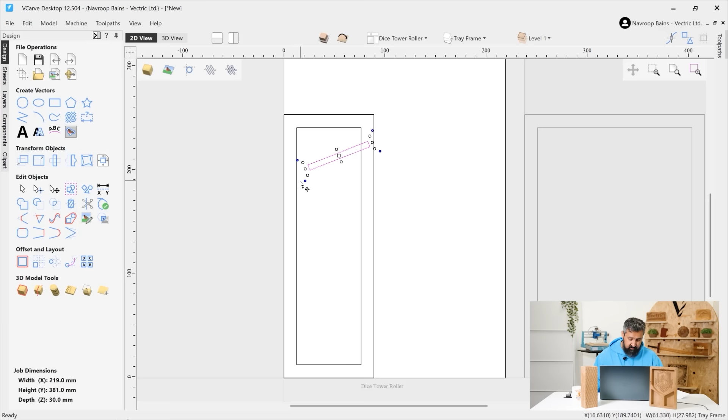So what I'm just going to do now is roughly position this to where I want it, kind of overlapping this edge here. I'm going to use this blue rotation handle to rotate this to get the angle for the rolling that I want. You can see it's starting to take shape, but clearly this is not enough room here to get the dice through, so let's reduce the shape a little bit. Let's zoom in and pull that ramp in just a little bit there.

Now what we can do is use our measurements to aid us. If we come over to the measure tool, which is just over here under Edit Objects, I'm going to measure the distance from this edge here to this edge here. I can see that it's currently 30 millimeters, that's plenty of room for the dice to get through. So that's already a good start, and I'm quite happy with that.

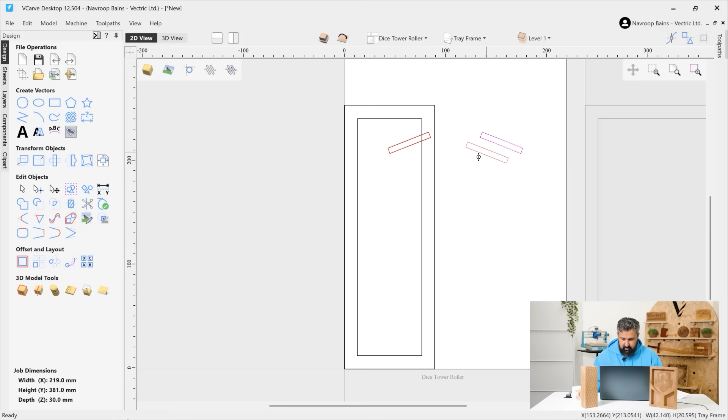With that in mind, I'm going to now make a copy of this. I'm going to press Control Shift H to make a horizontal copy - you can see it's flipped it over there. I'm just going to drag this one into a rough placeholder on the left-hand side here. Again, I'm going to measure between these ramps to make sure there's enough room for the dice to roll through. So let's go from the very tip here down to the top of this ramp here - that's 46 mil, plenty of room for my dice. Again I can measure from the edge here to the edge here - 29 millimeters, and that's great because I know in this case my D20 is 25 mil tip to tip.

Finally, I'm going to make another ramp, and that is going to be the exit. So we've got one for the entrance, one for it to roll again, and then we're going to have an exit ramp here as well. Let's select our top ramp, hold Control and Shift, and I'm just going to left mouse click and drag a copy of this one.

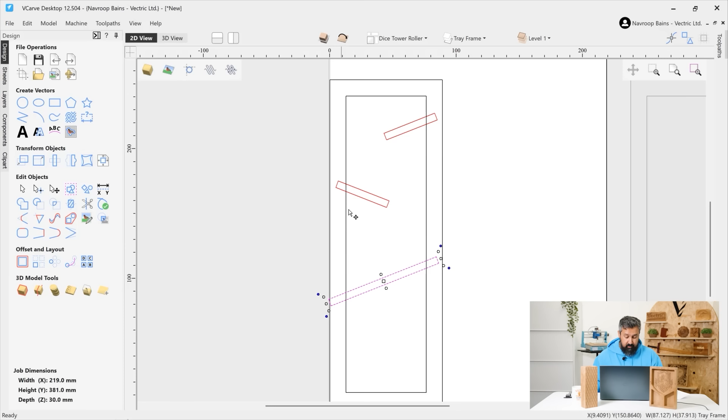I'm just going to let go around here, and I'm going to elongate this one so it exits all the way through the tower, so wonderful, that goes past the edge. We're serving two purposes here, because we're having a ramp for the dice to exit, but also underneath that we've got this big pocket we're going to form to store our dice.

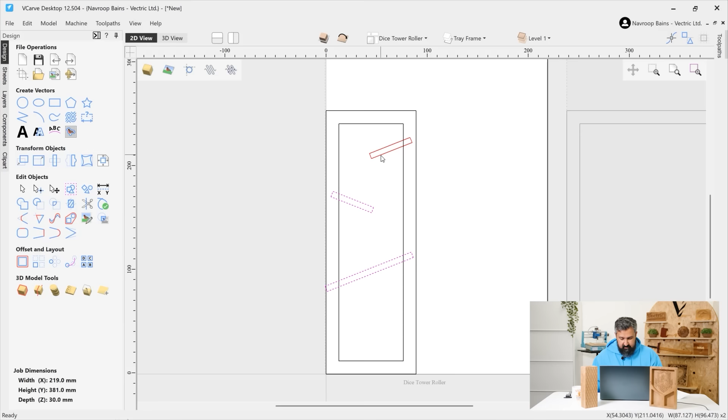With that in mind, we've got a rough setup for our ramps. We should really put these on their own layer so they're separated and we can come back to them if we make a mistake. So left mouse click while holding Shift, right mouse click, move to a layer, new layer, and we'll call this one Tower Ramps. We'll give this a different color, let's go for orange, and click OK.

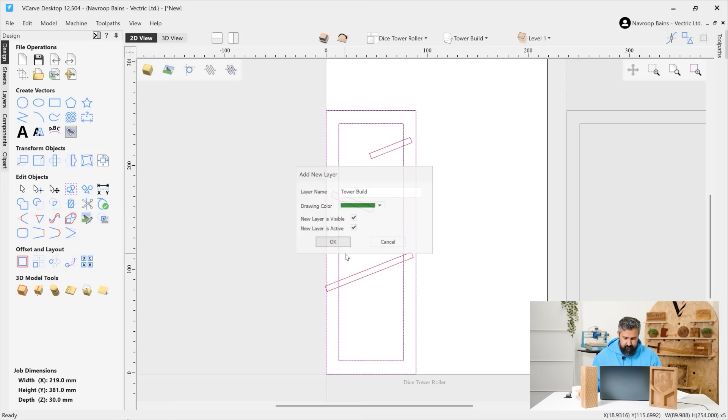Now the benefit of this is we have a copy of these vectors for later if we make any mistakes. So I'm going to select all of our vectors, left mouse click and drag, and copy these vectors, not move this time. Copy to layer, new layer, and I'll call this one Tower Build, because now we're going to take all the vectors we've just made and start building them into the actual one unit of the roller element. I'll give this a nice green color, click OK, and let's start turning off the layers we don't need for the moment.

We don't need the tower frame on this sheet, we don't need the ramps for the moment, we're going to use this as the active layer. So let's double left mouse click to make sure that is the active layer. Now that we've got our ramp set up, let's look at trimming away some of these elements to make sure the vectors are all lined up, and we're also going to add a gap here for the entrance and an exit for our dice.

To exit through, we're going to go back to the draw rectangle tool. This time we're going to hover our mouse until we snap to this corner here, left mouse click, drag until we snap to this corner here, and then drag this vector just past the top. The reason we're doing this is because we want to make sure that when we come to cut this, the end mill cuts past that so we get a lovely clean finish for our entrance. And we're going to do the same with the exit.

So we're going to come to here, snap to this point just here where the ramp meets the inside frame. Left mouse click, and then we can drag down to this ramp, and drag it out. In fact, I'm going to drag it down to the tip of the ramp here, and drag that out. Wonderful, now we have our exit here as well, and now we can start trimming away our vectors to actually make this all come together.

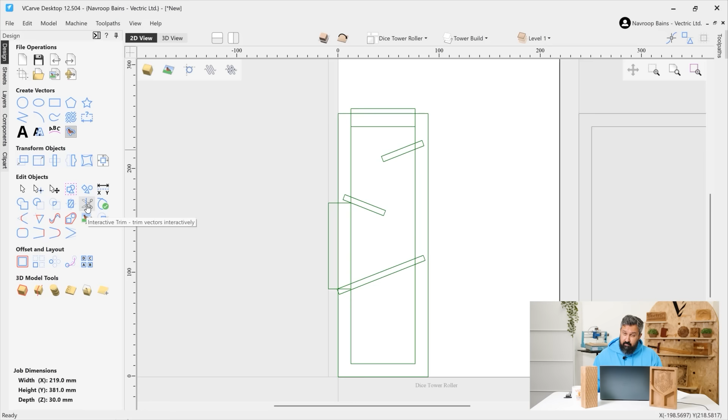To do that, let's go to Edit Objects, click on this icon here which is a pair of scissors, and we're going to start trimming away these vectors. Now it's important to have the rejoin trimmed sections on, because this will mean that when we trim away these sections, the vectors will be rejoined again to make a solid vector. Let's zoom in so we can see nice and clearly what we're working with, and we're going to get rid of this section just here and cut away this section here. Wonderful, so now the ramp's part of the frame.

Now we need to think about how we're going to do this, so we need to get rid of this one. In fact, we'll Control Z and get rid of this one first, and then go back in and get rid of this one here. So what was actually happening there is the software had an overlap of vectors, and it was trying to decide which one to delete, because one is on top and one is on the bottom. In that case it made the decision to delete that entire area, but as we can see, we can just easily go back, Control Z, and rectify that.

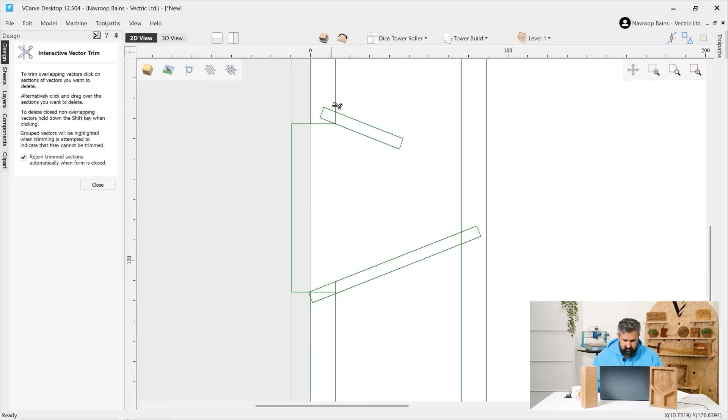So we need to get rid of this section just here at the top as well, okay, so that's our entrance. Now what we need to do is come down and start deleting these elements for our exit. We can get rid of this section just here, and then this section just here. Wonderful, and we'll start to build up our ramp here. We'll start to clean up this area, so we'll really zoom in to make sure nothing is missed.

And we just get rid of that vector there. And finally, we can get rid of this section just here. Okay, and so now that is effectively our pocket set up.

So what we can do now is have a look at adding in some magnets to make sure our rolling element sticks together. You can see over here, I've got my rolling tray, and you can see I've put some magnets in, and these will help the lids stick together. So let's have a look at how we get those into the software. I'll just pop that back down over here for the moment.

And I know in this case, I'm actually using 5mm by 2mm neodymium magnets. Now, the 5mm is actually the diameter of the width of the magnet in this case.

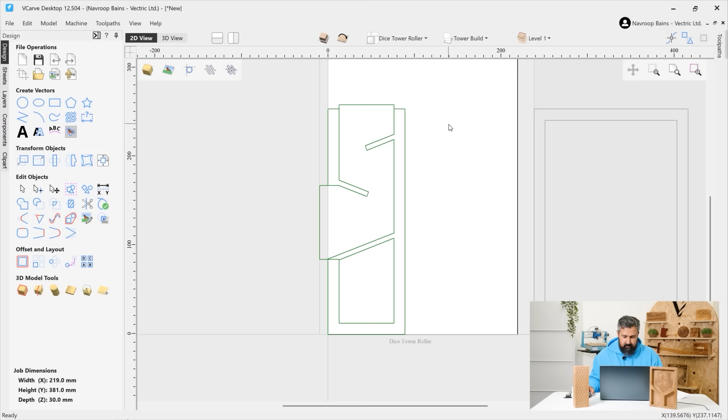And I'm going to use the layer to my advantage here, and I'm going to turn back on my tower frame, because what we can do is, using these vectors, create a corner square that will help us align our magnets. So if I go back over to the draw rectangle tool for the moment, we're going to snap our pointer over this corner here and just drag it out until it meets that corner over there. Wonderful. So now we've got effectively an alignment square.

And we're going to go into the draw circle tool. So let's come over to the left hand side and click on draw circle. And the diameter, as I mentioned, is 5mm. So we hover our mouse in the middle of this square, and because the software now knows we've got this square to align to, it's picked up that this is the middle of it, so we can just simply left mouse click, and there we are, we have a magnet.

Now we need to get the magnets into the other corners. Now what's a really simple way of doing so? Well, the software makes a really easy way to do this, which is to mirror it.

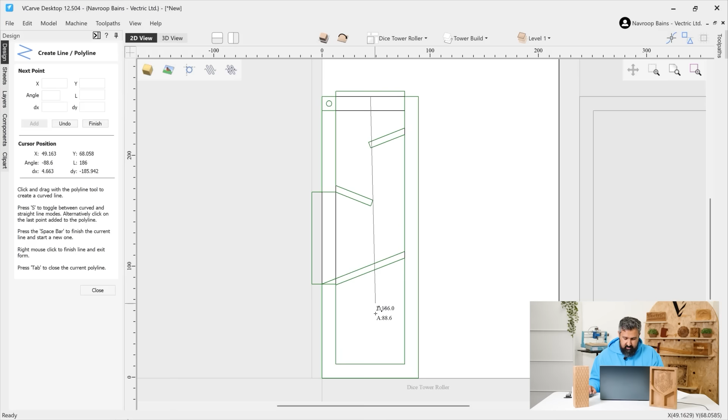So I'm just going to create some polylines first to show you how we can take advantage of that mirror tool. So let's go over to Draw Polyline, and I'm going to just hover my mouse until it snaps to the midpoint of this tower, and I'm just going to pop one down all the way to the bottom there. Press space on the keyboard, and then we'll find the midpoint horizontally of this tower. Now I can see here it gives me a Y value of 127, which is half of 254.

So if you're ever unsure, you can look at the Y value there on the screen as well. Nice and dynamic for you.

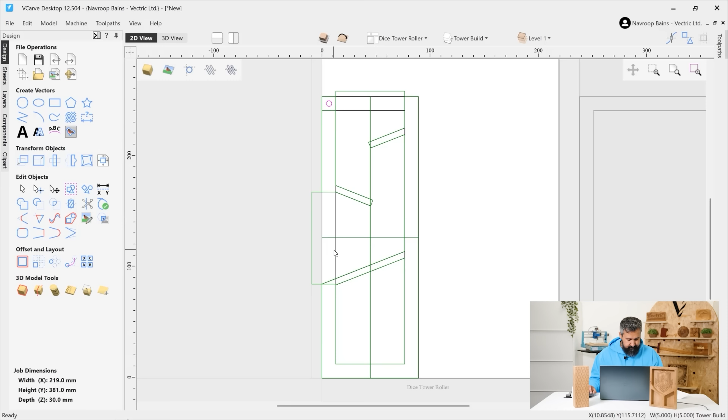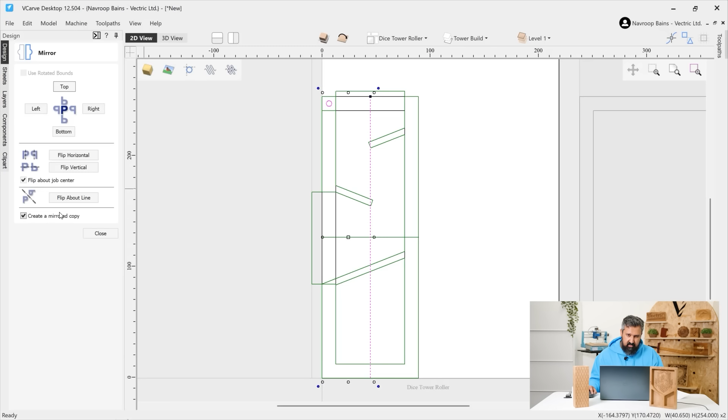Wonderful. Now these lines will inform our flipping for our magnets. So with that in mind, let's click on our magnet, and we're going to go over to this tool here under Transform Objects, which is Mirror Selected Objects. You can see there's this option here which says Flip About Job Center, but underneath that there's Flip About Line. So we haven't selected a line yet, so let's left mouse click while holding Shift to click on the line we want to flip about, and that becomes available, and we want to create a mirrored copy, so make sure you have that checked. Click Flip About Line, and there you go.

Just like that, we have an aligned magnet, and we're going to do the same for the rest of these. So we'll go with this line here, and again, this line just here. Wonderful. And now we have some magnets into our corners.

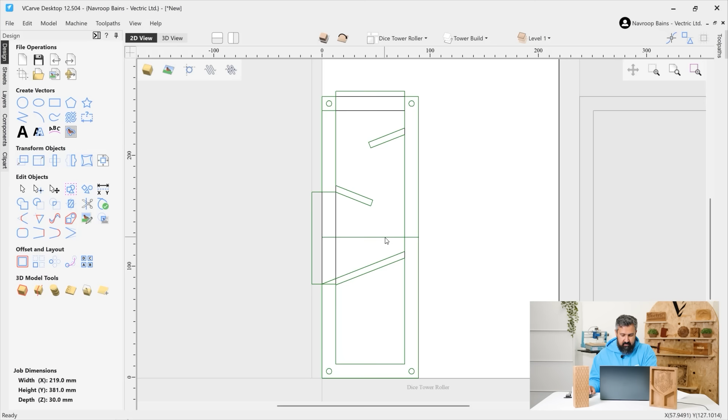We can delete out our alignment lines for the moment. And I'm going to turn off our tower frame, and I will actually insert one more magnet because I think it'd be a good idea to have another magnet here for a little bit of extra strength for the lid. I'm just going to delete the corner alignment square as well. We don't need that anymore.

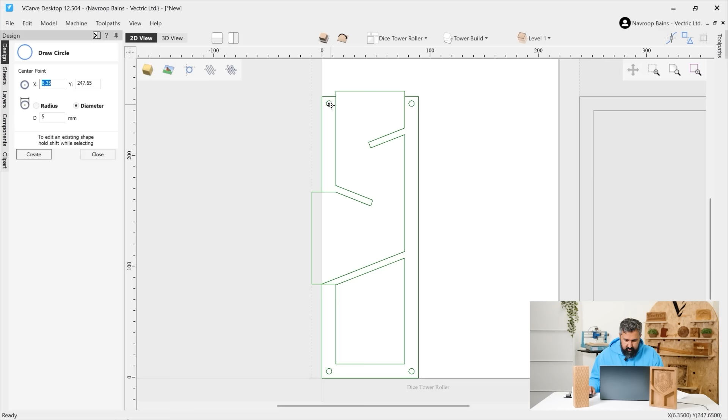And we'll go back into our draw circle tool, so I can use this as the alignment for the previous circle. So if I just drag down, I can pop that in place. I can also actually just use a vector value as well, so there is a value I can just pop in here.

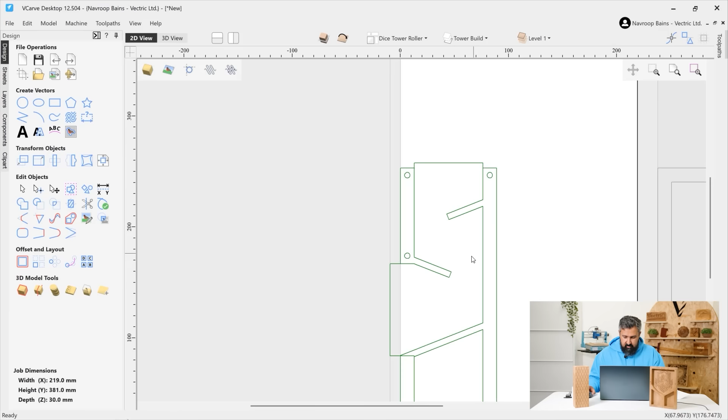So for example, if I know the X point in this case is 6.35, I can put it on that X point, and I can give it a Y point down here of 175. So if I put 175, click on create, and that puts that magnet in alignment with the other magnet from the top there.

Now finally, we just need to put our magnets on their own layer so they're all separated and nice and easy for us to work with. So let's hold Shift while selecting our magnets, and we'll right mouse click. We're going to move to layer, new layer, and we'll call this one tower magnets, so it's nice and clear as to where they are present. We'll put these into blue and click OK.

And now we have effectively our tower pocket set up for tool pathing, as well as our magnets set up for tool pathing as well.

Now, while I'm here, I'm actually going to take advantage of some of these vectors to simulate onto my other sheet for my dice tower here. Because what we're going to be doing now is, in a moment, we'll be looking at the top side of this lid. But what we've effectively done is created the underside of that. So everything that you can see here on my hands is now effectively finished in the software. We just need to make a copy of it on the left-hand side, and I'll show you how to do that in just a moment.

Let's just clean up this vector just a little bit. We've got this little extra bit here we can delete, so I'm just going to get rid of that. And now we have a pocket here that we can use to store our dice.

Now we need to simulate this to the other sheet, and the reason for this is because these need to line up with the same pocket on the other side. Now if you think about it, we're looking at this from the underside, which means we need to flip it when it goes onto the actual rolling element over here.

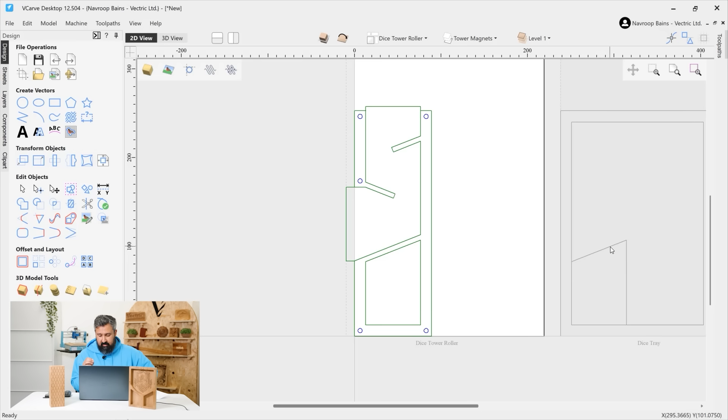So I'm just going to right mouse click on this vector. I'm going to choose copy to sheet, and I'm going to go for dice tray. And you'll notice this is in the bottom right hand corner, also the bottom left hand corner here. And the reason for that, and the reason why I lined up my rectangles to be in the XY datum position of 0,0, is because then I can align these.

So now what I've done is effectively, if I'm copying this to the other sheet, I know they're in line with each other. So even if I move these vectors around now, and I come to put the actual vectors in the middle of the worksheet, it's not a big deal because I've already lined them up, so I know they're in the right position. So we're good to go.

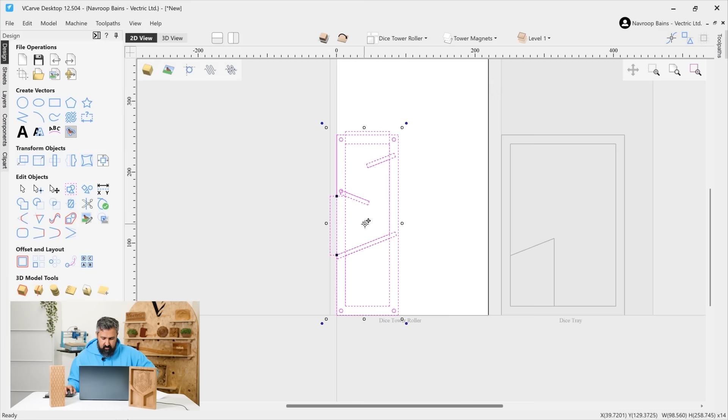All right, so let's get back onto our underside here, and we're going to actually make a copy of this. So we're just going to turn on our tower frame, our ramps, and we're just going to take the whole lot of this, left mouse click with our mouse and drag over to select the whole lot, click on it again, and we are just going to drag this up a bit and in a bit.

Now the reason for this is because in a moment I'm going to make a copy of this, but I just want to make sure that I've got enough room for my end mill to kind of pass around when I come to tool pathing.

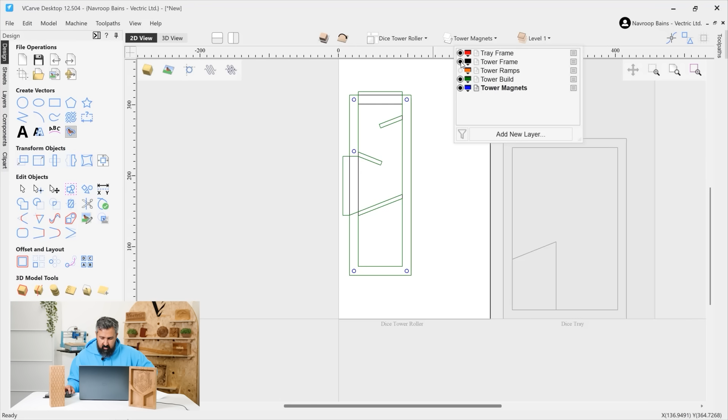I was really only using that bottom corner for alignment, so now that that's done, I can take advantage of my worksheet here. So we're going to turn off our frames, we're going to turn off the frame for the moment as well, and what we can do is have a look at flipping this onto the right hand side. In fact, we will turn on our frame for this one because we'll make sure we have a copy for the other side of it.

Okay, so let's left mouse click and drag. And then what I can do is on the keyboard, press Control, Shift, and H, and that flips a copy. So just like that, and we now have the underside effectively completed. We just need to do some tool pathing in a bit.

But before we get to that, let's look at creating the top side element here. So you can see this lovely, almost feather-like griffin effect for the texture on top of this lid. So how do we get that? Well, let's look at creating that in the software.

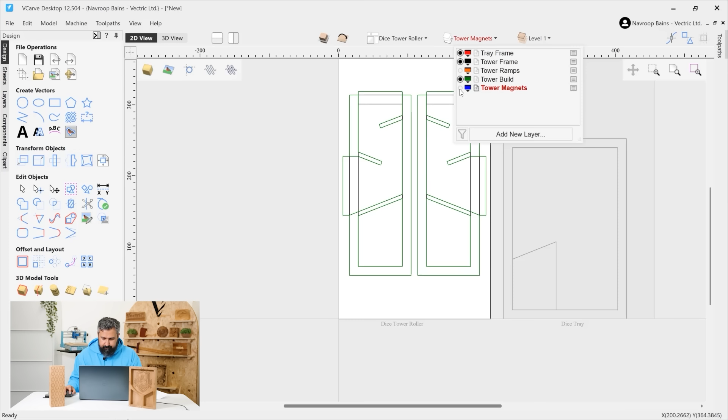So let's turn off our magnets layer for the moment. Let's turn off our tower builds for just a moment, because what I want to do is copy the frame to the other side.

Left mouse click, and in fact, while I'm looking at this, I can just about see that the gap here might be a little bit too small for my end mill. So again, we'll use the measuring tool to our advantage here, and we'll see how big this gap is between them.

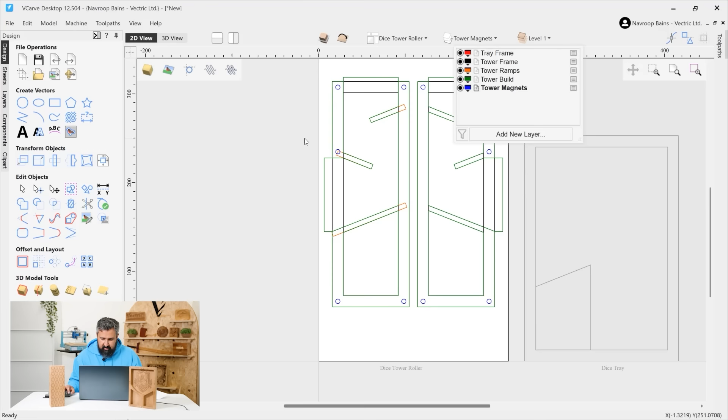Okay, so what I will do actually is turn back on our layers, and we'll just shift this one to the left with our keyboard, just 1, 2, and we'll do the same with this one, 1, 2. Just really want to make sure that my end mill has enough room to move through here, because we will be putting some dowels into this to help our flipping method later. So I just want to really make sure that we've got enough room for everything.

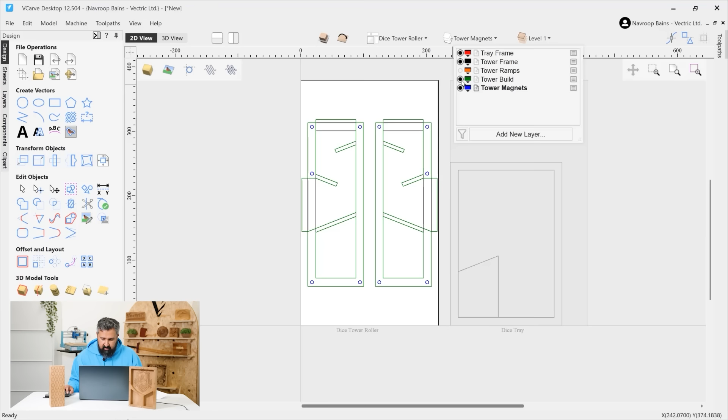Okay, so let's go back to our layers. Let's turn off our ramps, and we're going to turn off our build, and we're going to keep the tower frame on. So let's make that the active layer.

We're going to left mouse click, hold shift, left mouse click, and then right mouse click, copy to other side. And so what that's now done, if we click this button at the top here to flip between the top and the bottom sides, is created the frame on the other side for our lid. So we know they're going to line up.

This is really important, because when we come to actually flip this on the machine, we need to make sure that we cut everything out in alignment so that the lid isn't skewed. So let's put these onto their own layer.

Let's select both of those, right mouse click, we'll move to layer, and let's call this new layer tower lid. And let's give this a different color. Let's go for a much brighter blue, so it's very obvious as to what this layer is.

And you can see in the background here, there's a kind of a lighter, kind of almost teal color. That is actually the top side or the back side of this project. So you can see the tower frame on the other side here. All right, so we're just going to make sure our tower lid is the active layer.

And now what we're going to do is import some vectors. Now I've gone to the liberty of creating some vectors for you that you can use in this case. So if you come over to import a bitmap or vectors, you'll have these provided to you. And this is going to be the shells full pattern EPS file. So I'm just going to double left mouse click that to bring it in.

And you can see we kind of got this scaly shell-like effect, but to me it reminds me of griffin feathers. If you look at like a griffin feather chest for any type of fantasy artwork, it almost has this kind of effect. So what we're going to do with this is we are going to just click it while it's still here.

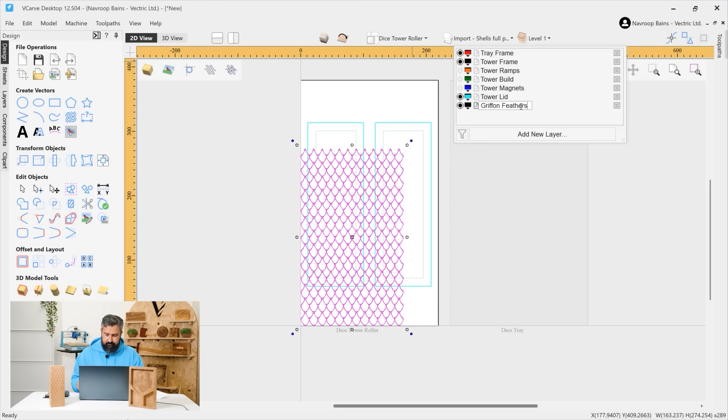We'll move it onto its own layer, always keeping everything nice and organized. So move to new layer, or in fact, actually it has its own layer, so we'll just rename this one. So we'll rename this one to Griffon Feathers. Okay, and we'll leave this one black for now, so they are selected.

And we're just going to move these up in alignment with the box. Okay, so roughly aligning them kind of where the box is, where we want them to be.

And now what we're going to do is trim these vectors to the boundary of that box. So how do we do that? We come over to Edit Objects, we go to the Trim Selected Objects to Last Selected Object tool.

So just like the tool says, we're going to be trimming the objects that we've selected to the last one that we select. So we need to hold Shift, select the object we need to trim to, which is our border, and then we're going to clear outside that boundary.

Okay, so let's click on Clear and let's see what happens. So right now the software is having a bit of a think about it, collecting the vector and component data, and so it's going to start then trimming around that boundary here.

to get rid of any elements outside of that border. Now what we're going to do again is actually use the mirroring option here to copy this to the other side as well. So instead of having to do this twice, we can just do it with one time and then flip it to the other side as well.

So let's have a look at doing that. So if we take our element here, we can do Control Shift H, and just like that, our lids are set up. So now we've got our vectors all in their individual layers. We've got our lids with the vectors on. So now what we need to have a look at is doing some tool pathing.

So this is the exciting part. So with that in mind, let's just go to Zoom or Active View to Drawing Limits.

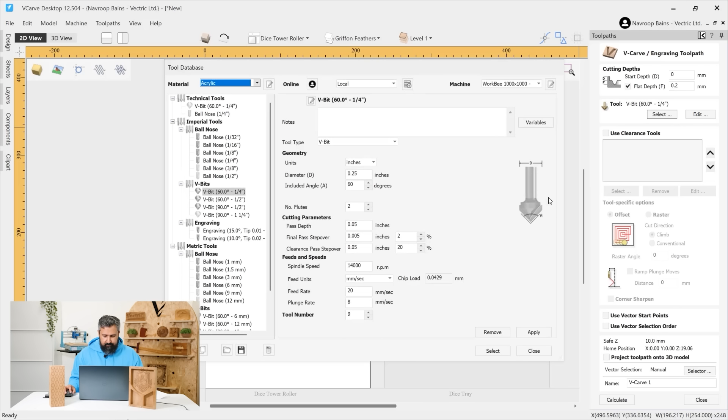And the tool in this case we want to use is a 60-degree 1/4 inch V-bit. Now, these tool settings are safe and appropriate for my machine after thorough testing. I highly recommend that for any tooling you see in this file, double check that it's safe and appropriate for your machine, and of course change tools where you need to. If you don't have access to the same tools that I do here, do make sure you change those, okay?

So let's close that out, and we'll call this one V-carve feathers, so it's nice and clear as to what it is. Click on calculate, and we can have a look at what that looks like in the software currently for the preview. Wonderful. So what I can see here is that the V-carving is going to be carving the groove just like we wanted. Okay, so let's have a look at what that preview looks like.

And that is very nice. But I think we can darken this up a little bit to get an almost texture-like effect like you can see over here. So with that in mind, we're going to go back into the 2D view, and we're going to use a laser toolpath.

So what we're going to do this time is use a laser cut and fill, and I've got a 6-watt laser here. Again, I tested this one on my machine, so safe and sound for my machine. Make sure you set your laser up correctly, that the kerf is all correct for your particular laser.

But this time I'm going to use a hatch fill with a step over of 0.25 millimeters, 45-degree angle, fill it regionally, and I'm going to just make sure that I rename this one to laser feathers. And we're just going to have a look at what this looks like currently.

Okay, so we're just going to click on calculate. And what we'll do is have a look at the preview. This is where the preview really comes in handy, because if there's anything that you don't like here or that you want to readjust, the preview is quite powerful in letting you do that, because it shows you exactly what it should look like on the machine.

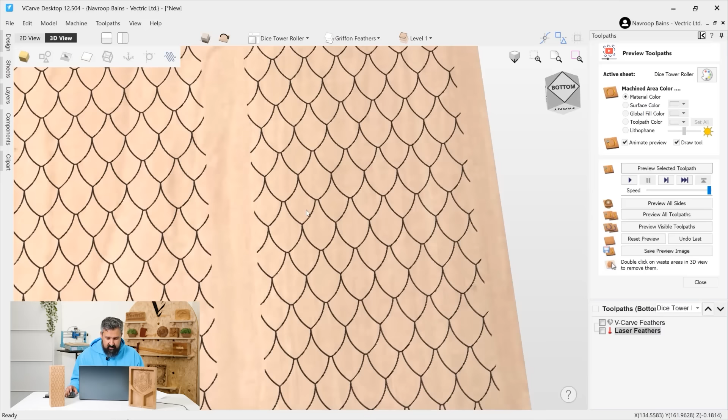Now in this case, I'm really happy. That is a lovely darkened effect there. So it's gone in between where we've carved there and just darkened it up. It gives that lovely kind of almost rustic, high fantasy feel to this lid. So I'm quite happy with that.

So let's have a look at making a cutout pass. Let's grab our outline border here, and we'll left mouse click while holding shift to select the other one, and we'll go for a profile. Now in this case, what I can do is click Z equals, and it'll tell me the exact thickness of my material.

I actually want half of that, because I want to reduce the stress on the tool. I want to make sure that when I cut through, for any mistakes, I can cut halfway, and then I can just see when I come to align it if there's any mistakes. So it's just a good safety option here.

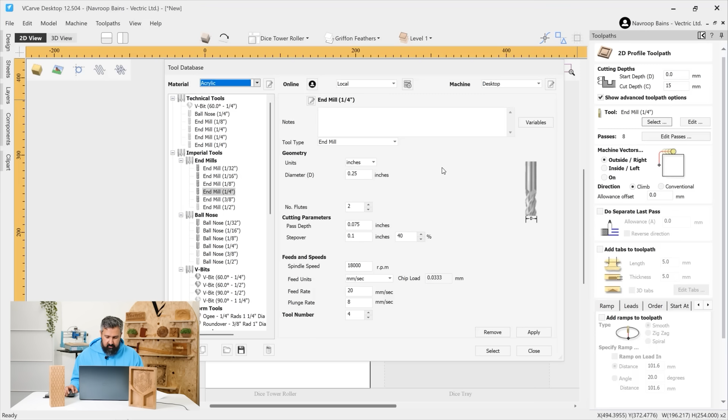So I can do Z/2 equals, and that will effectively do a formula that is what is half of Z, which is 30 in this case, which is 15. And that gives me my cut depth. Now, in this case, I'm using a 1/4 inch end mill. Again, these are safe and appropriate for my machine.

I'm going to cut outside right, and in this case, I am going to add some tabs. So let's click on Add Tabs to Toolpath. Let's go to Edit Tabs. We're going to have a constant number of 4 tabs. So let's add those in, and let's see what the software does.

Now, this is a really important step, because what we need to think about here is where's the exit for our dice roller? It's just here, right? So we need to make sure that the tabs aren't on the exit, because when we come to cut this out, the tab won't be there, since there will be no material there, because the pocket's already cut it out.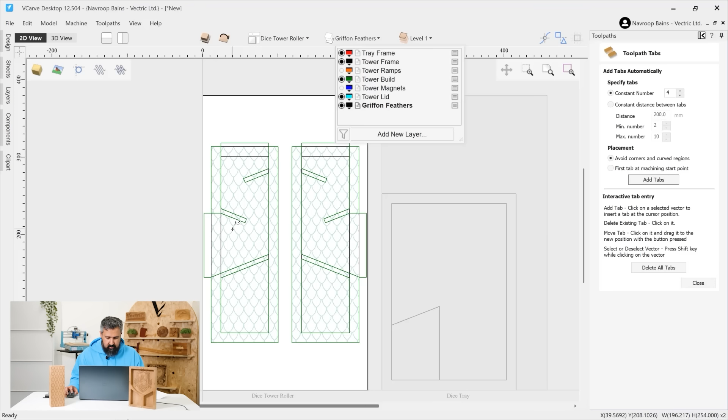So with that in mind, we can flip over, have a look, and surmise if we turn on our layers for the tower build here. We don't want a tab around the middle here, okay, because that's going to be cut away. So let's flip back over to the other side.

Now that we can see that, we'll click on Add Tabs. Oh, my apologies, let's just select our vectors. So let's just make sure our vectors are selected. There we go. And you can see here the pocket over here is an exit, so let's get rid of that tab there and place it in a more appropriate place, maybe up here.

And we'll do the same on this side. Wonderful, and we'll do the same with that. Those are much more beneficial placements for our tabs. So we can close that out. We can click on calculate, and we can call this one cut out lid.

And let's have a look at the preview for that toolpath. Wonderful, and you can see the tabs there, and you can see that it's not cut all the way through because I've only told it to cut halfway. And then what we can now do is have a look at the toolpath on the other side, and then we can have a look at the full preview all together.

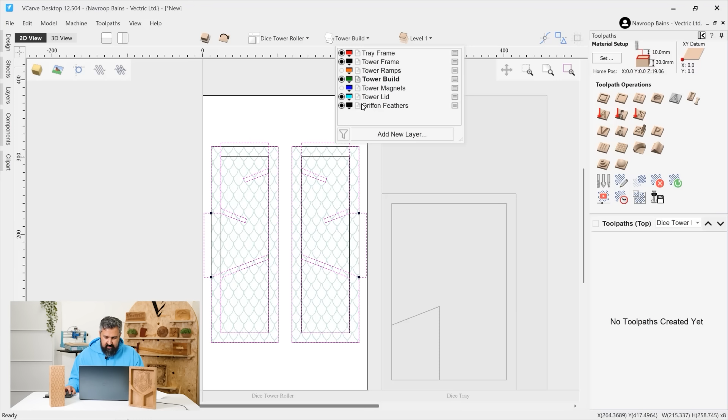So let's close up the preview form for just a moment. We're going to go back to the 2D view. We'll come up to this button at the very top of the software, and we will flip between our sides. We will turn to our tower build, so we're just going to make that the active layer. I'm just going to turn off tower frame for the moment, so I've just got my pockets here because these are the pockets I need to machine out.

So I'm just going to go for a pocket toolpath and hold shift and select all the areas that I want to pocket down. Now I'm actually going to go down 22 millimeters because we've got 30 mil of material here. So 22 millimeters is quite a lot, but the reason I'm going for it is because it gives plenty of room for when we put the lids together for the dice to roll through, so you have lots of room for the dice to get through, potentially even get multiple dice through at once. So again, we're going to use our 1/4 inch end mill.

I haven't changed the settings for these, these are the same as earlier, so that's all good. Now in this case, you need to ask yourself what you want to use, whether it's an offset or a raster. Now with an offset, you might get some markings where the tool will effectively machine from the middle out, and sometimes you can get some markings. And the same with the raster.

What you need to think about with your raster strategy is your step over, because the last thing you want is to have a large step over. Then effectively what you'll get is these kind of almost ridges where the machine cuts and then there's a step over and it cuts. So you need to really think about your machining time here, because your smaller step over means more machining time. So really have a think about the strategy that's going to work for you. And in this case, you can use a test cut here - this is the best time to use one to iron those things out.

In this case, I'm going to go to a raster, and I'll edit the step over, making it a really small one. Let's click OK. I'm going to call this one Pockets Roller, so I know exactly what it's for. Let's click Calculate and preview that toolpath.

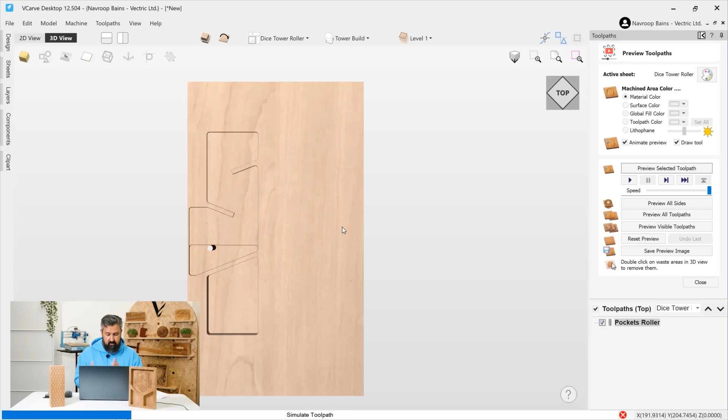You can dynamically adjust the 3D view here as well. If you ever want to see what's going on, you can right mouse click and drag the view around to see what everything looks like, and you can zoom in too.

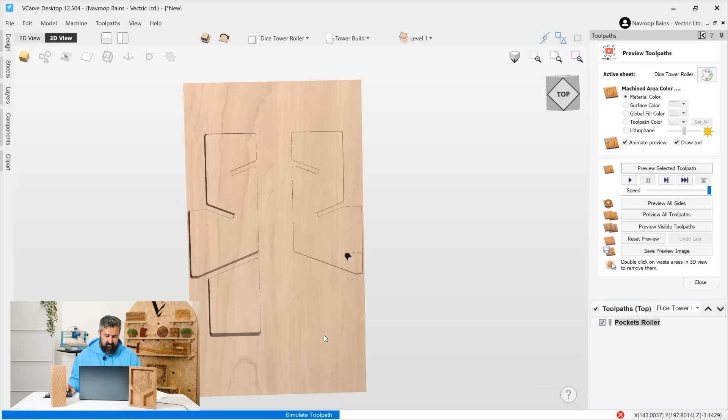As I mentioned earlier, we were worried about those raster markings, but because I've put such a tiny step over on this one, it's not really relevant here, since the step over isn't as large as it would have been—about 40% I think I had on the tool originally. We're just waiting for the pockets to finish up, then we'll move on to making our magnets.

At this stage, with our magnets, you really need to think about what your glue gap is going to be. Because neodymium magnets are quite small, you could go for a friction fit and try to make the hole just about the right size to get them in. But in my case, I'm going to use some super glue to make sure they're really stuck in properly and everything is okay.

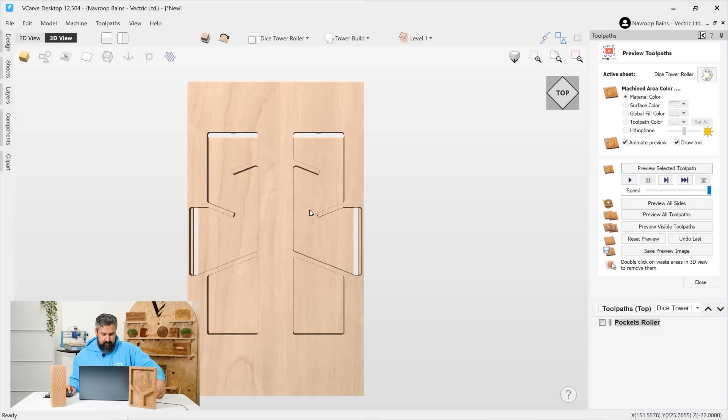Let's pop back over to the 2D view here. Just to point out on the 3D view, you can see through the top and sides where our cutout path on the back side, the lid side, has cut through—and actually one of the tabs has been cut through. This is why the preview is really useful, because we've already spotted a mistake we can fix by placing that tab somewhere else where that entry point isn't, so we can get rid of that and put the tab elsewhere.

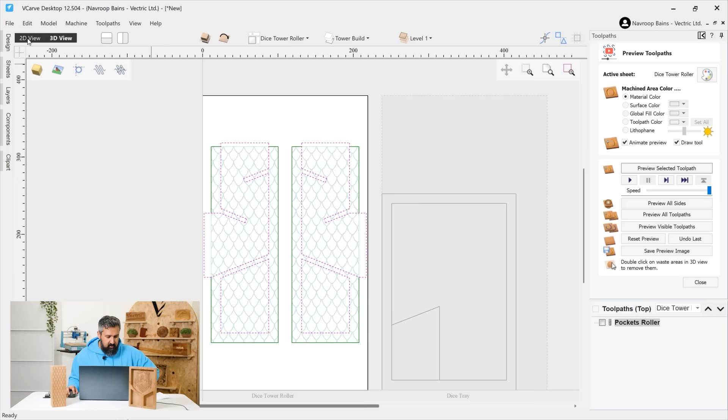So like I was saying about the magnets, let's go to the magnet layers and click on that. What we're going to do here is create a pocket for these layers. Let's right mouse click onto the magnet layer, select layer vectors, close that out, click on pocket toolpath. I'm going to use an 1/8 inch end mill here. As I said earlier, you really want to think about the glue gap.

What we can do here is add in a pocket allowance. It's important to get the positive and negative values right here. In this case, it's going to be a negative value—minus 0.2. That's going to cut slightly bigger than the current pocket, so it's not going to be 5 mil exactly, it's going to be 5.2 effectively.

It just means that when we come to push on our magnets, they will go in, and there's a bit of room for the glue to also adhere to it. But more importantly, you're not affecting the wood around it, so you don't want to push it in and find out on your finished project that you've made an error and scuffed the wood. It gives you a little bit of room for error.

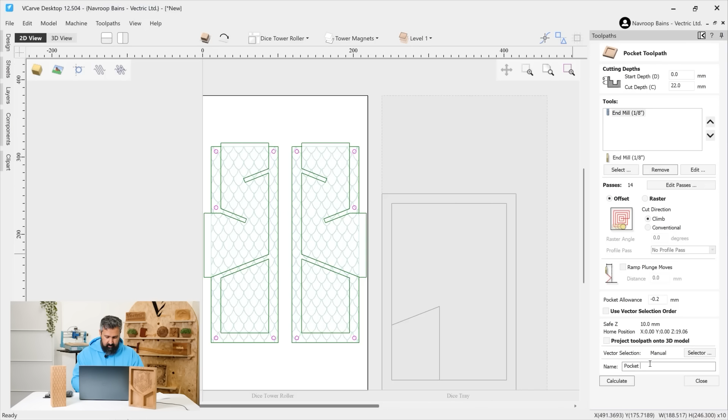So let's click on this and call this one pocket magnets. In fact, let's call it pocket roller magnet, so it's nice and clear. And we'll preview that toolpath.

Lovely, we've got our magnets in place, and the last thing we need to do is get our cutout pass. So this is where we need to turn back on our tower frame, and we're going to go for a profile just like we did on the other side, using the exact same settings.

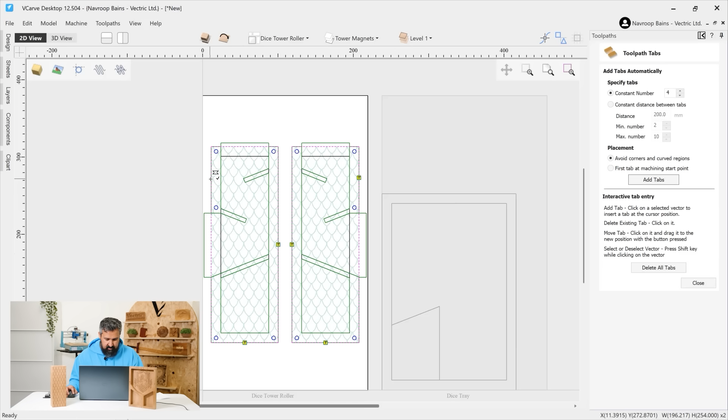Let's select our vectors here, and add in our tabs, click on edit tabs. We want a constant number of 4. Let's add those tabs in. Now we thought about this, right? We know where our exit and entrance is going to be. So let's get rid of those tabs on this side and this side. What we can do is pop them there, and then perhaps one down here instead, and one down here instead.

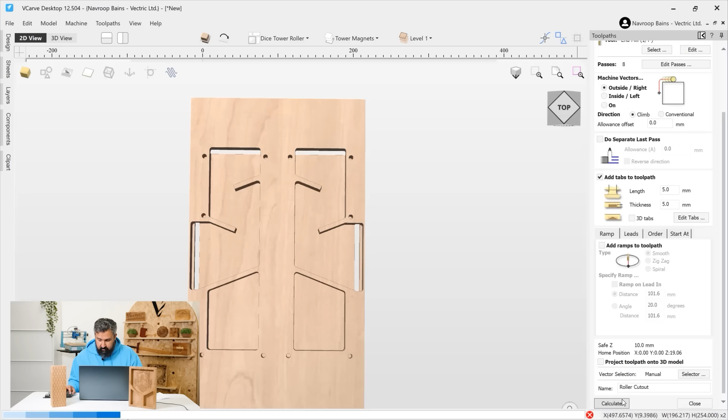You might not need 4 tabs in the end, you could just use 3, but in this case I'm being extra safe. I'm going to call this one roller cutout, and I can click on calculate and preview that toolpath.

As you can see, we've got our tabs here, and that's cut through. Like I said, you can see that the tabs almost line up on the back side here. It's not too much of a big deal. I can saw those off with a bit of finishing, so it's not too bad. But you can see why the preview is so important.

Already we've spotted that we don't need a tab at the top there; we need to put it somewhere else. You can see how building this up bit by bit allows you to see where, before you go to machining, you need to amend anything if you need to. But with that in place, I'm very happy with that. Everything looks as intended. So we can now have a look at making the actual roller element over here on my left-hand side.

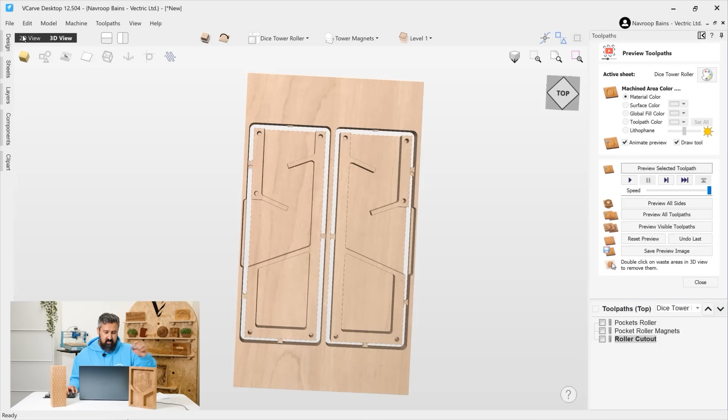So let's pop back into the 2D view. We'll close down the preview for the moment, and zoom to the active view. Over here we can see our rolling tray. Now what we're going to be looking at in a moment is getting these pockets all sorted on our sheet over here, and also more importantly this lovely rustic looking effect.

Now this is actually a sketch carving, laser sketch carving to be clear, and this is actually done off a 3D model, and it's a really cool effect. So let's have a look at how we achieve that. Let's pop that down, and we're going to hop back into the software.

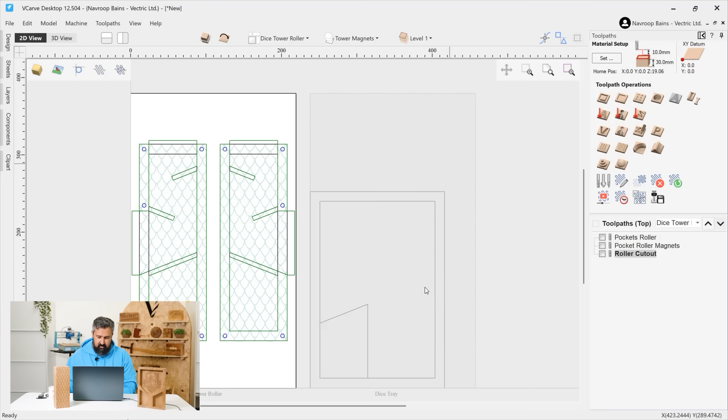Now that we're back in the software, we need to think about how we're going to approach this sheet. So let's double left mouse click onto the dice tray sheet. Now I'm going to left mouse click, drag, and bring this all into the center a little bit. So just drag that up a little bit. Wonderful. And let's get some layer organization going on as well.

So I'm going to move this singular pocket here to its own layer, and we're going to call this one tray pockets, because there's actually going to be multiple of these in just a moment. And we're going to turn that into a purple color. Let's click OK. Now, as I mentioned earlier, we need to make sure that this is flipped, because currently what we're looking at is the lid's underside on the left-hand side here in the software.

So we need to make sure that when we put the lid on, the pocket is facing the other way on the tray, because it needs to line up, okay? So how we do that is we need to flip this by literally just clicking H on the keyboard while it's selected, and that's it. Simple as that. We've now got our pocket flipped.

Now we need to make a copy of this pocket on the other side, so again we'll use the tools that we did earlier. Let's pop over to the design commands, and I'm just going to click on the draw polyline tool. And again, I'm going to put in a line for the center of our tray here.

We'll do the same across it horizontally. We know in this case it's 254 tall, but we're just going to find the middle point here and pop that across there. We'll need that for the magnets later.

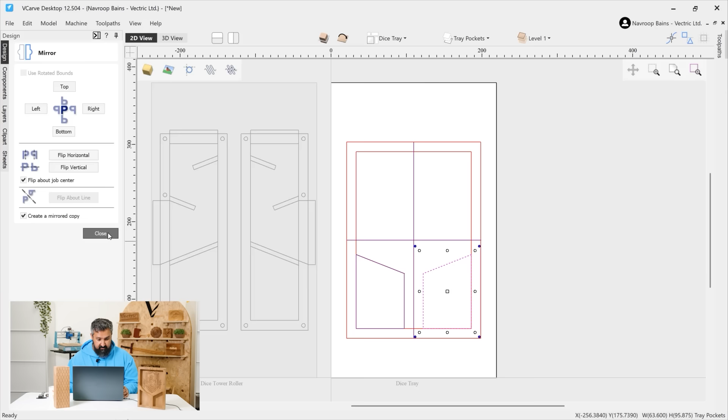Let's close that out and come to our pocket down here, and go over to the mirror selected objects tool. We're going to use a flip about line again. Hold shift, select your vertical line, flip about line. Wonderful, we now have our pockets lined up.

I'm just going to put these alignment vectors onto their own layer as well, so I can get rid of them in just a moment. Let's go to new layer and call these alignment vectors, click OK. We'll turn those off and make the tray pockets the active layer.

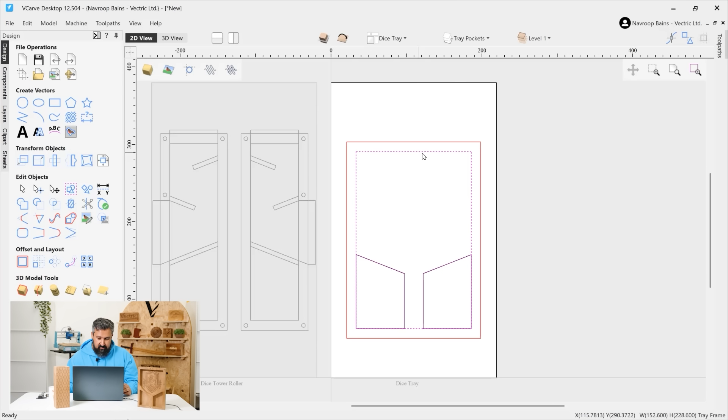What I'm going to do is take this inner pocket and drag it up a bit, because this is going to make the kind of shield-like effect we can see on the tray over here. Click on that vector and drag it up into a rough position that we like. About there is fine, and then I'm going to zoom in here so we can see what I'm doing with node editing.

While I've got the vector selected, press N on the keyboard for node editing. We're going to hover over this point here, you see the mouse cursor changes, left mouse click this node and just drag it down to a point which I like the look of, about there. Taking some artistic liberty here, but it's not too important about the exact angle of this - it's just to help me draw out my shield shape. With that in mind, I can exit by pressing escape from node editing.

I'm going to move this onto the pockets layer as well, so move to layer, and we'll call this one tray pockets. So tray pockets is now the active layer. Fantastic, and now let's build up our shield.

Quick and easy, go over to the draw arc tool under create vectors. I'm going to pick a point at the bottom here and drag it up to a point around here where I'm happy with, maybe about here, and then just start building out that shield shape. I can hover my mouse out like this, and then when I'm happy with it, click on the page again.

All good, and now what I can do is turn back on my alignment vectors, go over to the mirror selected objects tool, hold shift with my vertical vector, flip about line, and just like that we have some shield vectors. Now let's get to trimming so we can make this shield all one piece.

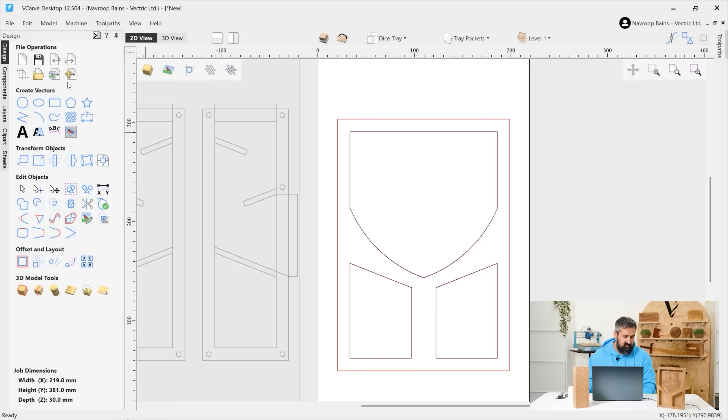So let's go over to the clipart tab, and we're going to click on design and make, because I've already downloaded and installed it. We're going to scroll down till we find our griffin, and I'm just going to left mouse click, drag that onto our worksheet, let go. Wonderful, there is our griffin in all its glory.

I'm just going to move it into our position here, and size it down just a wee bit. I'm going to hold shift on the keyboard and just size it down just a little bit more, and then just press down on the keyboard to shift it into place. Wonderful, and the last thing we need to do is make some magnets.

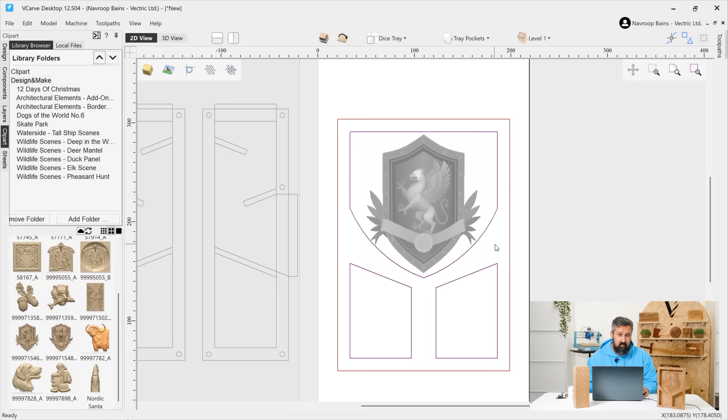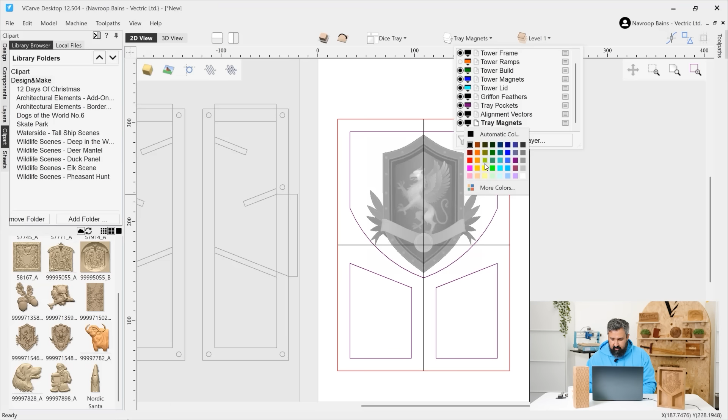So let's pop on our alignment vectors again, and this time we're going to add a new layer, and we're going to call this layer tray magnets, and we'll give it a color - this time we'll go for a light green.

Again, we can use the box method to align this all up, so draw our little box in the top corner. Let's just make sure tray magnets is the active layer. There you go. Let's get our diameter of tool ready - we've got a 5mm magnet.

Beautiful. Again, we'll use our mirror selected objects tool to mirror it to the other side. So let's select our line, flip it, select our horizontal line, flip it, and finally the vertical line, flip once more, and that is our magnets all ready to go.

Now, at the moment I really do like the griffin design, but I think it could use a little bit of extra flair. There's a beautiful ribbon in the middle of it, and if we go to the 3D view, while it does look fantastic, I think it'd be really cool to get some text on there and another kind of high fantasy tabletop RPG symbol. In my case, I think a D20, a 20-sided dice, would be a wonderful addition. So let's go over to the 2D view and work on the text first.

Let's go for the text tool over under Create Vectors. In this case, I'm using this really lovely Old English text - it has a very Gothic feel, very high fantasy. Of course if you're maybe more into sci-fi or anything like that, there's plenty of fonts to choose from here, so do have a play around with these.

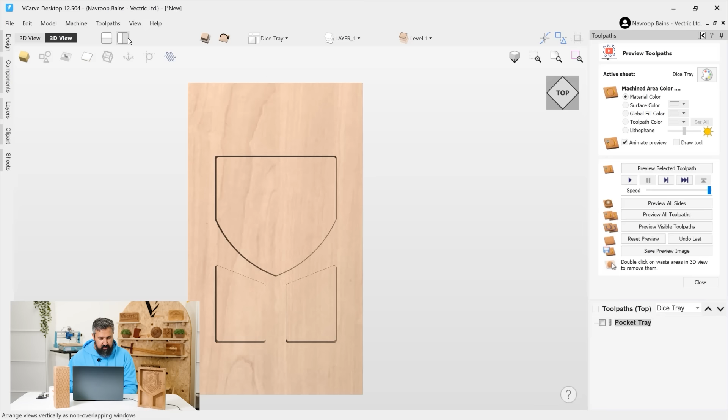Now let's go back to the 2D view and go for magnets. Again we can use our layer advantage here, go to tray magnets, right mouse click, select all layer vectors, so it selects them for us, makes our life a lot easier. We'll remove the 1/4 inch there and go for the 1/8 inch. We're going to add in that little pocket allowance just to make the fit for the magnets a bit easier on ourselves, and we'll call this one tray magnets. Let's click on calculate and preview these toolpaths.

That's great. And then this is the exciting bit - we now get to have a look at the griffin and see what it looks like as a sketch carving. So let's select our model and go over to this icon here for laser sketch carving.

In this case I'm using my 6-watt laser from before again, let me just check all the settings for that are appropriate. Yes indeed, and power is 50%. It's a 3D model, so making sure I've got the selection set to 3D model. In this case I'm using the model boundary, which means the laser will only go up to the boundary of the model itself - it's only going to be machining on that laser boundary.

I'm going to use a line thickness of 4. The reason I'm using 4 is because it will pick enough detail out of the griffin that I won't lose any detail with lines blurring into each other. If you go too thick, you can risk that, for example where the feathers are, you get really thick lines that blend together, and you don't really want that. So in this case I went for a very thin outline because it gives it, I think, quite a nice effect. Of course, have a play around with it - if it takes your fancy to have a thicker line, do absolutely go for it.

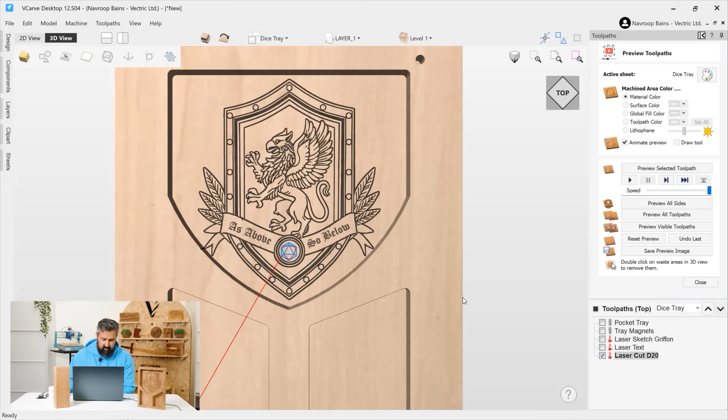Finally, let's go for our last laser toolpath before we go for a cutout. We're gonna just select our D20, and we're gonna go for a cut on this time. Let's go for laser cut D20, click on calculate. Let's have a look at what that looks like. Click on preview toolpath. Yeah, I think that looks wonderful. I think it's a really nice addition to that middle there - it just looks a bit less naked. It gives you options for customization.

That's the great thing about these dynamic models - while the models themselves are great, there's also plenty of room for customization on them as well. So feel free to have a play around with those.

Now, finally, we just need to add in a cutout pass, and then we need to go for a profile toolpath. So let's go back to our view here and we'll click on the outside border. This time we can go the full Z depth, so go Z equals 30 mil - that will give me the exact thickness of my material setup. And we'll go for the 1/4 inch end mill. We'll use some tabs to hold it in place. We don't have to worry about the placement too much in this case, because we're not having to flip it onto the other side. And we will close that out.

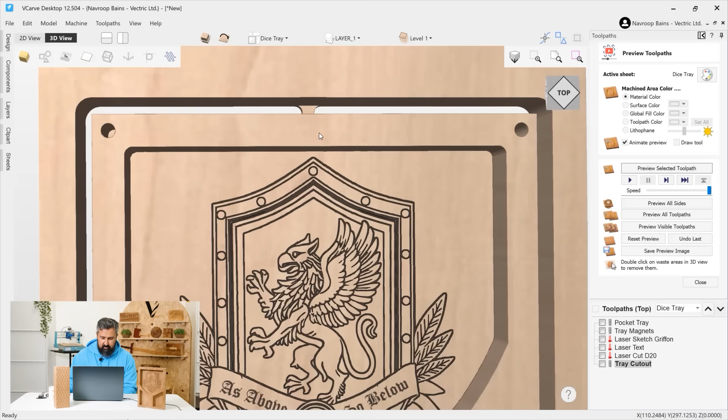Click on calculate after we call this one profile - actually, we'll call this one tray cutout, so it's nice and clear. Alright, let's have a look at the preview for that. You can see it's cutting around the edges, and eventually you'll see some tabs pop in. There you go, not too big either, so we can just go ahead and chop those off with a saw later on, and it'll make our lives a lot easier when it comes to finishing.

So all in all, that is our tray now done, but there is one extra step we need to think about. Now we need to pop back over to the 2D view, and what we need to do is think about how we're going to flip our lid section. Because when we come to actually machine this, we're going to machine the underside, and then we're going to flip it over horizontally onto the other side to our lid.

So I'm going to use a dowel method here. What I'm going to do is put some dowels on the underside here, cut those through, put the dowels in, and cut the same dowels into my spoil board because I've got a sacrificial spoil board. That means I can know that I can definitely line up my flip. So when I flip it over, the dowels will line up with the holes in the spoil board. They'll be held in tight. I'll make sure everything's screwed down and held correctly. And it just means when I come to cut it out, everything will line up nice and easy.

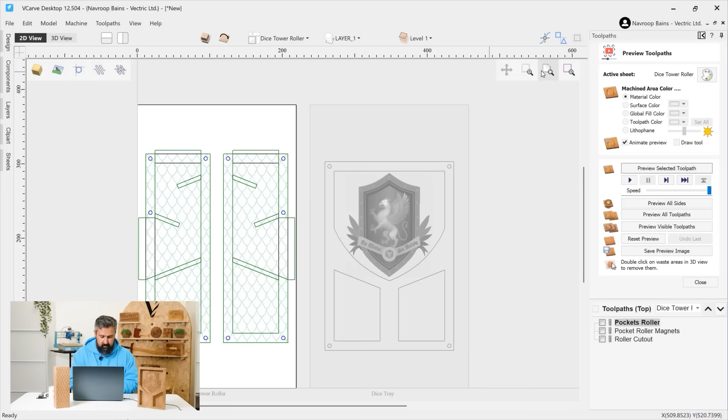Okay, so I'm just going to pop some dowels in. Let's close out our preview form, go back over to our design sheet, and we'll go over to draw circle. Now in my case, I've measured my dowels and they're about 7 or 8 mil - varying a little bit, but I'm going to go for an 8 mil hole here. I'm going to pop one here, one here, and one at the bottom of the sheet just here.

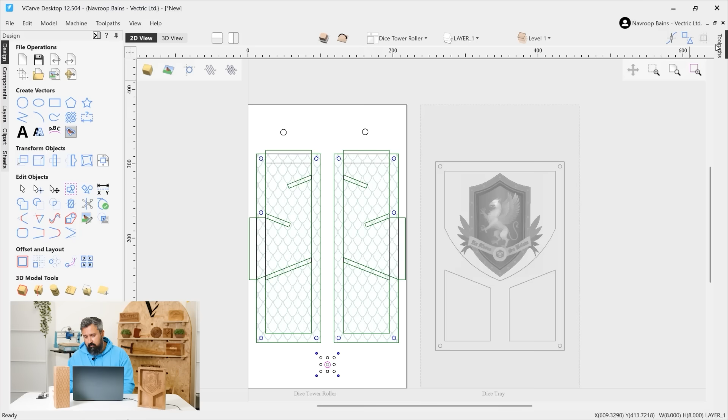Okay, so with the dowel placement, because I've got plenty of material to work with here, what I'm really conscious of is just making sure the end mill for my cutout pass doesn't cut into where the dowel hole is going to be. How do you check that? Well, if you go to the toolpath menu, let's just pin that. Let's select this roller cutout toolpath, and you can see the wireframe here, right? But if you click on the top left over here, you can see the visibility by changing it from wireframe to solid. Now this is going to show you the diameter of the actual tool itself.

So this is a 0.25 inch end mill, and the blue line here is showing you physically where the end mill is going to go. You can see I've got plenty of clearance here for my dowels, so I'm all good to go. It's a really handy tool I highly recommend you start using, because if it ever comes to cutting things out on the same sheet, this allows you to see where that end mill is cutting exactly, so you can move your vectors around and place them appropriately.

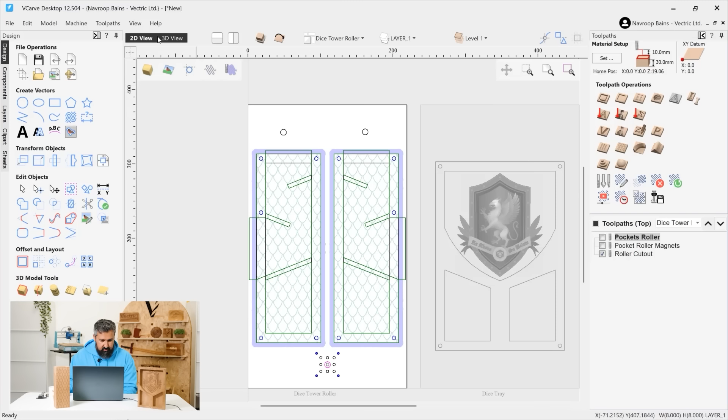Let's just quickly get some dowel holes made. Let's go for these, and I'll turn off that toolpath for a moment. Now it's really important, I'm going to copy these to the other side actually, because I'm going to create the toolpaths for this on the other side as well. So let's go for pockets, and we'll cut these through.

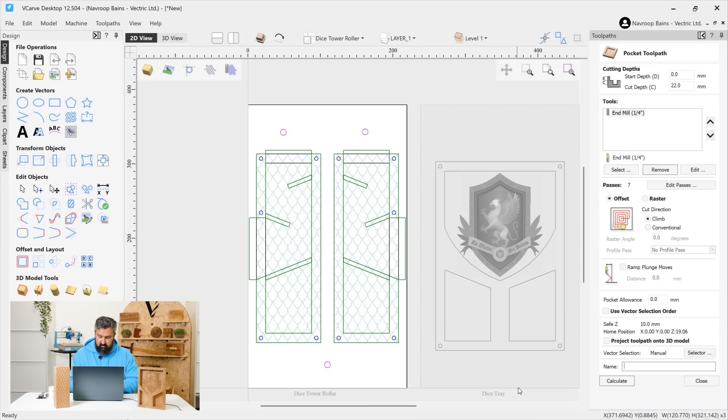Let's just have a look at our tooling. So let's go for roller dowels. Okay, cut all the way through. So those will cut all the way through now.

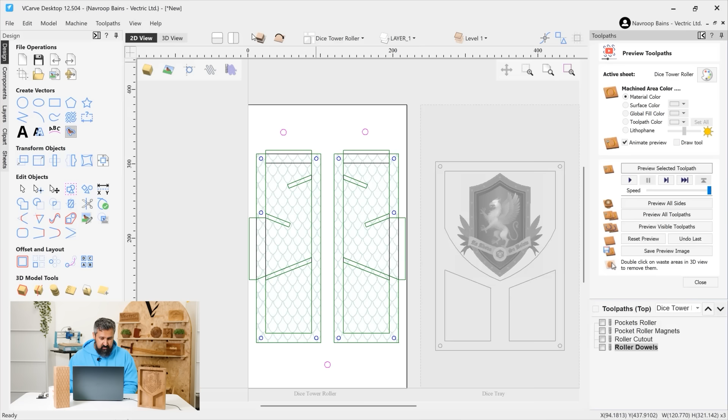Wonderful. And then we can do the same on the other side, so we just flip over. In fact, what I can do is show you a really handy tool, which is copy to other side for the toolpath. You can right mouse click and copy that toolpath to the other side as well. So let's pop over to the other side. Saves you having to recreate it all from scratch.

The only thing you need to watch out for is the software is now giving you a warning - you notice how the toolpath is in italics? It's telling you that you haven't assigned any vectors to it yet. So let's do that, and let's select our dowels. These are going to be for the spoil board, so we'll call these one.

Spoil board dowels. The important thing here is, let's also adjust the depth for those - I don't want to go that deep with these dowels. So we can go 10 mil deep on the spoil board. We don't want to go all the way through the spoil board.

One tip I'll give you here is to think about your Z-zeroing. When we come to Z-zero for the dowels on the top side, for the underside of the lid here, we're going to be going for the material surface. But you need to think about what you're going to do with your spoil board. So make sure when you zero for your spoil board, you've got your Z-zero set in the right place for your dowels. It's really important that you remember that and keep that in mind.

So you can always use the notes feature in the software. If you click on edit and go to notes, you can actually create some notes for yourself. And if you put a full stop at the start of your notes, every time you open the file up, it will pop up with these notes for you. So if you want to give yourself a reminder, that is a really good way to do it.

But that covers all of our tool pathing. So now what we're going to do is have a look at how we actually cut this out. Let's have a look at this in action.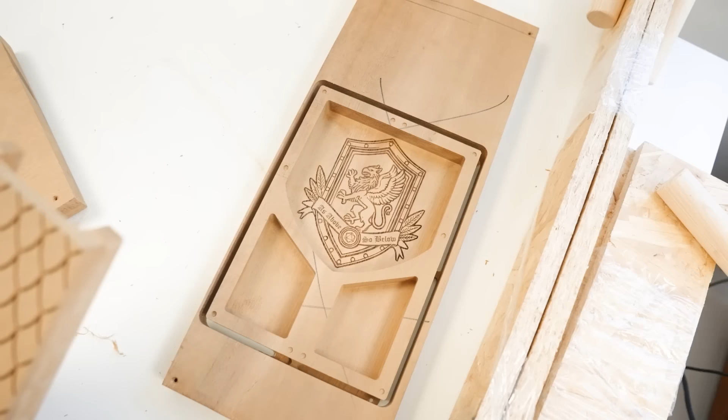And this is the finished perfect dice tower. Let's just pop it open. You'll notice that I've actually got some extra magnets just down here, but don't worry, I've included them in the finished file for you as well. The reason I put those in is just to have a little bit of extra support, so when you're carrying this around in your backpack, for example, the lid won't just fall off.